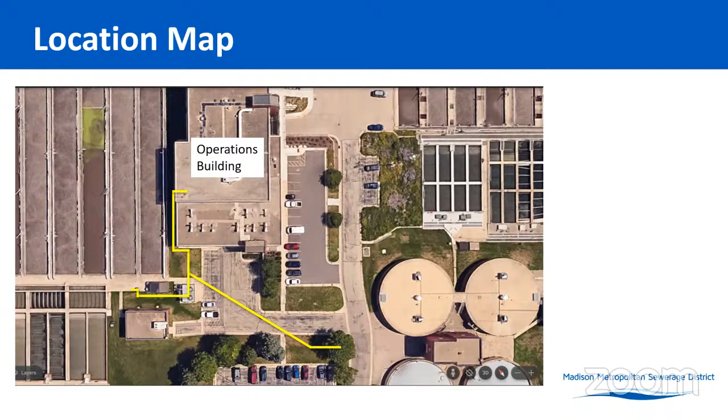The issues with this pipe: it's constructed of pre-insulated fiberglass, which is typically not used for hot water piping. We typically use carbon steel. Sections of this pipe are 40 plus years old, installed in the 6th and 7th additions in the late 1970s and early 1980s.

In recent years, they've had a history of leaks, sometimes leaking hundreds of thousands of gallons out of the pipeline at a time. So we have to do a quick repair on those.

The fiberglass piping requires specialized fittings and tools for installation and repair, something we don't have here in house. And a recent major break was deemed unrepairable with normal methods such as pipe clamps or repair patches, things like that.

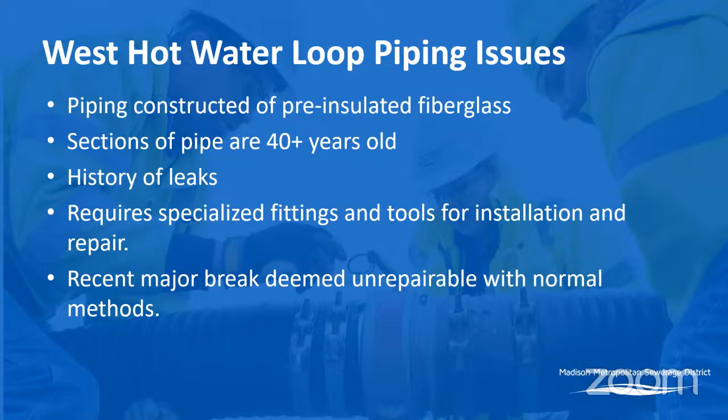Just to give you an idea, on the lower right where I've noted a leak location, this is where our carbon steel pipe meets the fiberglass line, and this area has been prone to leaks. Almost annually, we dig it up and put a repair patch on it. It leaks mainly in this area because you've got two different materials, steel and fiberglass, that expand at different rates, causing the leakage.

The major break location on the left occurred in January or early February, I think early February. Basically, the pipe sheared. A lot of water came out, we lost pressure in the system, and we immediately had to shut things down.

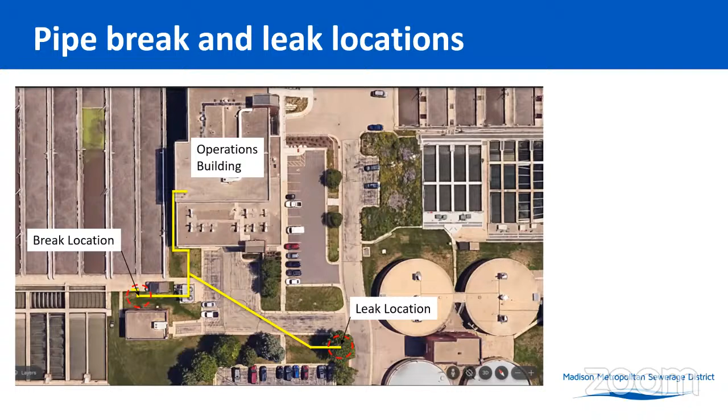I do have a picture of those pipelines here. Circled with the dashed circles are 3 different breaks in the pipeline - there's a hole and 2 shear fractures. You can see them on the bottom of the first picture and on the picture on the right.

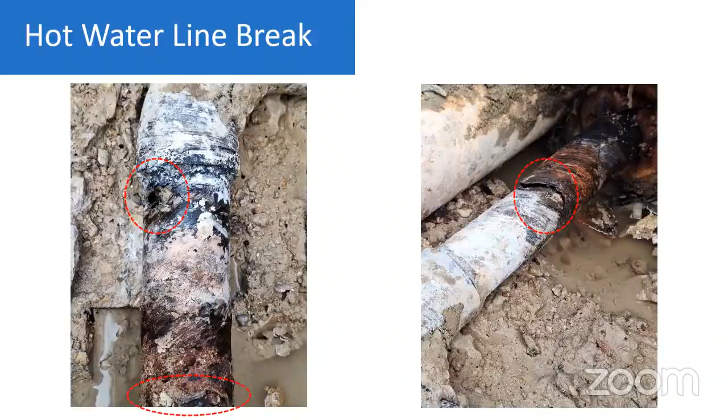So the importance and urgency of this project: the major pipeline break is unrepairable, we don't have the tools to fix the fiberglass piping, and it's a heating and cooling source for the operations building.

In the winter, it heats the operations building. In the summer, we take the hot water, run it through an absorption chiller, and that actually cools the building. It's a heat source for other process buildings on the west side of the plant, and it's also a heat sink for the blower engine. What I mean by that is once the hot water flows through the operations building and the west side and the heat's used out of it, we send that water to the engine where it picks up new heat. So it actually cools the engine, and we're using that waste heat from the engine to reheat the water.

If we don't have this loop in service and the temperatures get hot enough, we might not be able to use the blower engine, which means less biogas we're using and more electricity we're purchasing in the end to aerate the east side of the plant.

So the scope of the project involves removing the existing fiberglass piping, underground piping, and replacing that with new carbon steel piping with the proper thrust blocking to protect against expansion. The scope includes all excavation and backfilling by the contractor, removal and replacement of any curb, sidewalk, and floor. This piping comes into the building underground about 10 feet, so they'll have to break up some of the floor to get it installed properly.

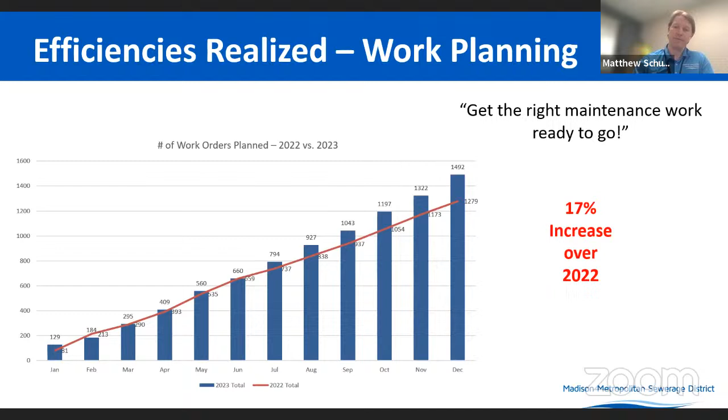But that work planning is only as good as our ability to actually get that work done in the field. So a major piece we also focused on is weekly scheduling, work scheduling. Really, this weekly scheduling is a routine with maintenance and operations where we work together on increasing the efficiency of our crews to ultimately get work done.

And how it does that is first, we understand a week in advance how much available labor we have for a crew, and we fill up that available labor with work orders that have been planned. We don't want our crews going out to the job and waiting for parts, right? So they're scheduling from a work bucket that's already got the materials needed, ready to go.

It also gives our operations team upfront notice of the processes and assets we need to have down to complete the work. So the reality is they can plan ahead of time on these outages. We have the equipment down and ready to go, so maintenance isn't waiting around. If the equipment's ready to go, we can start the work.

All this work has shown some really positive results. So really the end result is more work got done in 2023 than in 2022, which was also kind of a banner year since we started a revised work order tracking routine in early 2020. You can see here the increase shown: roughly 17% more maintenance tasks were finished within the maintenance crews in 2023 than in 2022.

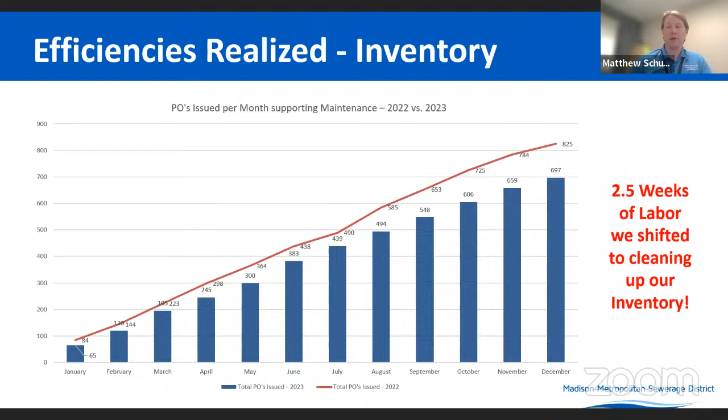And both those activities, the payback for us is we got time back, 2.5 weeks overall. That's time we invested in doing more improvement activities, cleaning up our inventory, and also supporting the planned work processes we just talked about.

So through RCM, we're looking to improve the effectiveness of our work to impact our strategic focus areas. We want to shift our culture from a reactive work culture, where we're dealing with issues as they come up, to a proactive culture, mitigating failures before they arise. In the end, this is safer, cheaper, and less risky for the district.

So what we have here is a P-F failure curve for a piece of equipment. Basically, the bottom axis is time, and the left axis is the resistance to failure. As time goes on, as an equipment or asset is used, it's most likely going to move towards failure.

That's at the end of the curve. There are ways to mitigate those failures by changing your maintenance practices. Right now, where we live is preventative maintenance. Those are basically time-based or equipment manufacturer-based tasks to keep the asset functioning properly. The problem with preventative maintenance is you really don't know the health of your equipment. You're just doing maintenance that's suggested to keep it operating.

In 2024, and a little bit last year, we tried to move towards predictive maintenance. Predictive maintenance is using tools to find out the health of your equipment and find minor defects before they become major. Through predictive maintenance, you can make repairs much more cheaply, much more effectively, and much earlier to prevent catastrophic failure.

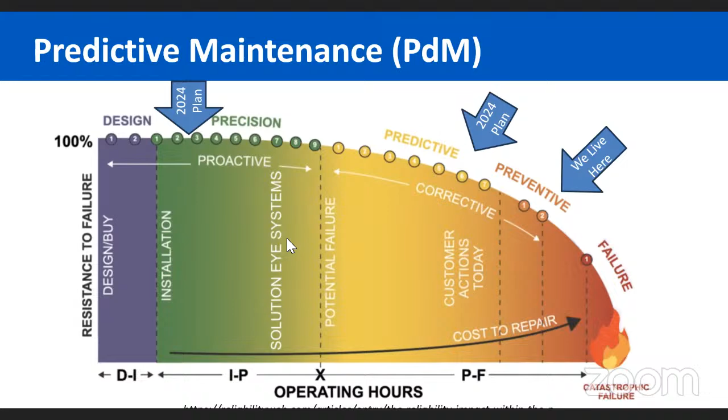One way we tried to increase effectiveness last year was performing electrical signature analysis. Electrical signature analysis is a tool developed by this gentleman, Howard Penrose. It basically evaluates the condition of mechanical or rotating equipment, for motors and driven equipment, by looking at the electrical signature that the piece of equipment produces.

Through his programs, he's identified different defects that you can see through these electrical signatures. Last year we had about 100 assets analyzed, and it takes about 3 to 5 minutes per asset for the analysis to be completed. Through this analysis we found 105 defects before failure - things like bearings wearing out, shaft imbalances, impeller imbalances, things like that.

Defects that can be fixed early and cost effectively without the equipment catastrophically failing. Also through his program, you can calculate the amount of initial or additional electrical demand on assets based on these defects. So what he found is annually we could be using about 242,000 more kilowatts of electrical demand based on these defects. By curing these defects, we can possibly save up to $35,000 a year in energy costs.

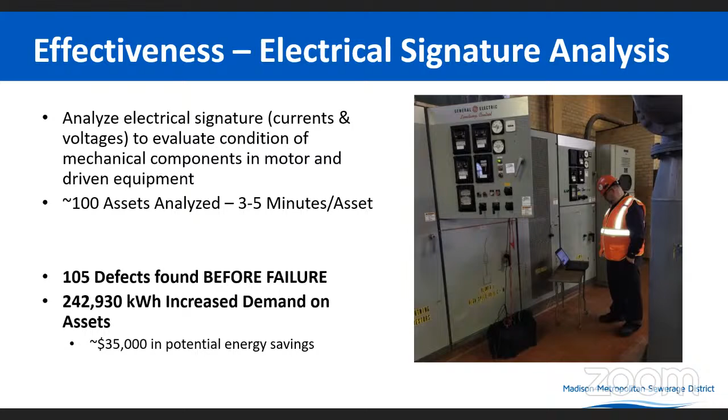Through the signature analysis, some other things came about. Through these defects, we could tell we're not lubricating our assets properly, or our assets aren't aligned properly. This is where precision maintenance comes in - getting that equipment set up properly so it functions well over the long term. This comes through training and standardization.

Getting the proper lubricants set up for the proper pieces of equipment, the proper amounts and types. Having our equipment aligned properly to proper tolerances keeps it running optimally. If you're not doing these things, you're actually introducing failure into the equipment and decreasing its life.

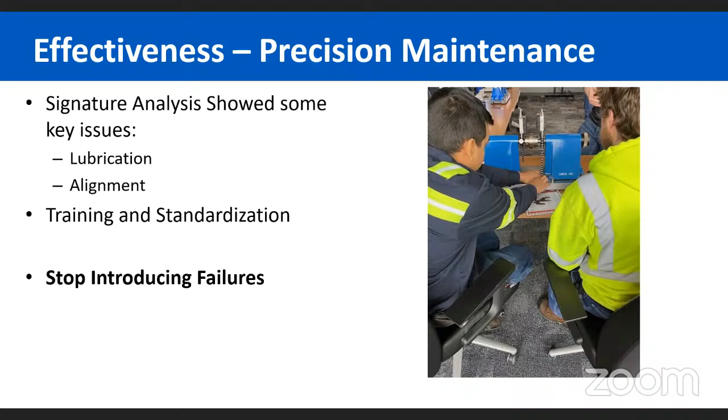Other than lubrication type and amount, lubrication cleanliness is a major contributor to asset failures and something we're looking to upgrade on. You might look at new oil when you take it out of the jug or barrel, and it looks clean, brand new, but there's things called critical clearance particles in oil. These are particles you can't see with the naked eye, but they can get in between the clearances of things like bearings, and those are the particles that actually do the most damage to the equipment.

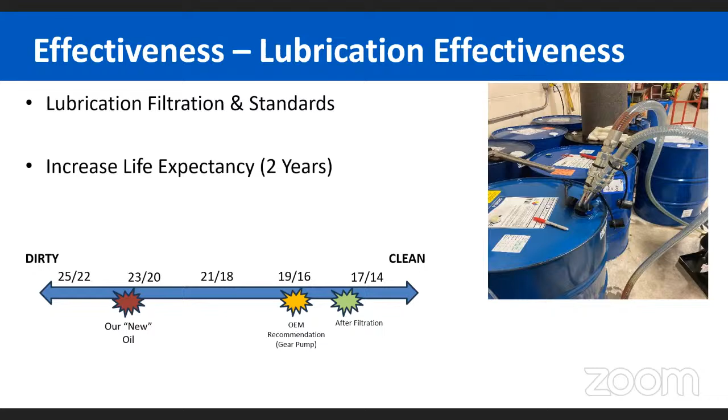Through filtration, we are able to get the oil cleaner than the original equipment manufacturer standards, and we can prolong the equipment life up to 2 years.

The final effectiveness tool we're using is ultrasonic analysis. You can see Dan there performing an analysis. It's basically a tool that can hear frequencies the human ear can't hear, but they indicate there are minor mechanical or electrical defects with the equipment. These are things like air leaks in pipes. You can't hear it - it's very quiet to the human ear - but these pick them up pretty well. And these air leaks can actually cost a lot of money in the end with compressors running longer, etc.

Using the ultrasonic tool, you can actually decrease the amount of time it takes to PM equipment by 66%, saving 307 hours annually, or about $46,000 in labor, as opposed to traditional methods of PMing electrical or mechanical equipment.

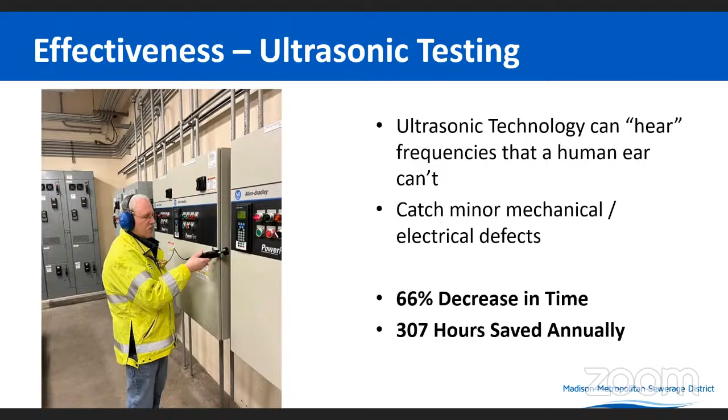Yeah, just more of a comment than a question, but I think this is terrific. I wholeheartedly support this, I can see a lot of advantages for doing this, and I think it's a terrific program. I do have a question though, and that is, this is a really timely topic given the spill we had recently. I'm wondering if there's any way we could apply this to our underground pipes and valves to really kind of foresee any potential damage in the future and take care of that. So I'd be interested to hear what you think about that.

Thank you. Matt, would you like to take this, or you want me to take it? I can start, and if you want to jump in. Sure. Thanks for the question, that's a good one. I think we're not promising to be able to solve every single failure that's out there. With RCM, I think it's a learning process that takes a lot of time, and we're just kind of starting out in our journey on this process.

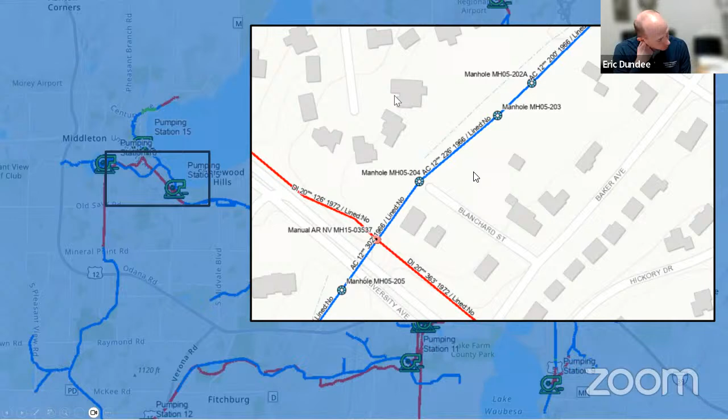We're talking about 145 miles of pipe. That's what we have. We have 98 miles of gravity main, which in our GIS system would be the blue lines, if you can see those. I apologize for those who can't see color, but that would be the blue lines. The red lines are force mains. So we have 32 miles of raw wastewater force mains, and then we also have our miles of pipe for effluent force mains back to our outfalls.

On the screen, you can see in the center, if you can see my pointer of the inset, there is a red manhole here, pink. That manhole is the manhole we were trying to work in. So as people have tried to understand the situation, that manhole is, I would call that a conflict structure. It has a gravity sewer main flowing through it, and it has a force main flowing through it. Now, the force main is not an open system, so it's just the pipe going through the manhole. But that is right here in this area.

The greenway that the city of Madison was under construction with, and Michael has talked about, is right to the west-northwest of the property, or of our gravity main, going down to Lake Mendota Drive and Lake Mendota, so that's just along the north side, I would call that. I'll move through here and come back to this picture in a couple slides, but that's kind of the setup we were at, working in this manhole off of University Avenue to replace the valve. The greenway was to the north. We'll go through here. So this is what the manhole looks like.

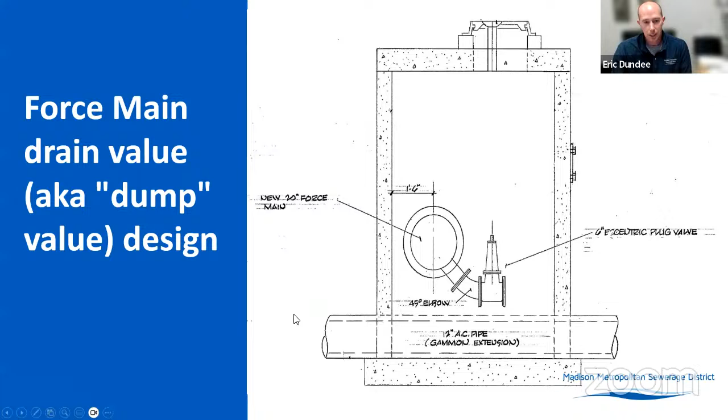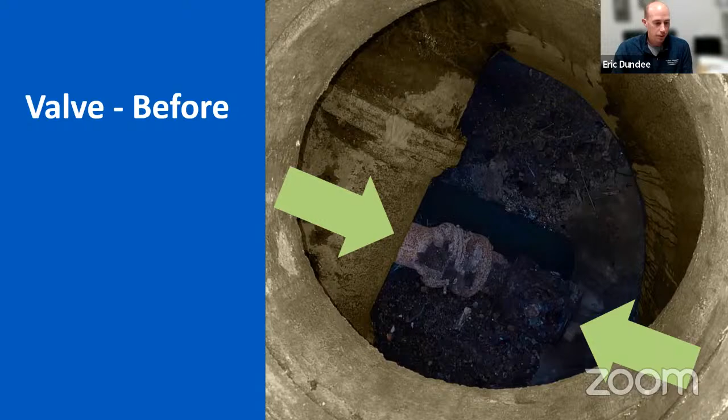As we've talked and gone through this process from Thursday to now, we've already started our review of the situation. So here it is.

Here's what the 50-year-old valve looks like. Here in the bottom right of the screen is the actual plug valve, the actual plug. So that is what we were trying to get opened to relieve the pipe. As you can see with the condition, it was frozen in place.

What we have now also found is on the other side of the pipe, where the force main was, you can see that this was already solid sediment, grease, and other things that had settled into the force main. So we already know that when that valve opened up, this type of material is what came out of the force main into the gravity main and helped create the blockage in the gravity main that created the SSO.

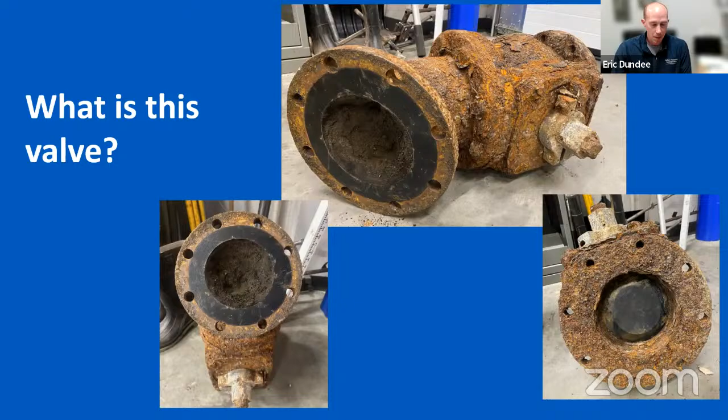So there's a couple things going on in this situation, and that's part of the story here—that amount of material that was in the force main came out and helped create the blockage. So I'm going to go back to the map to explain it a little closer.

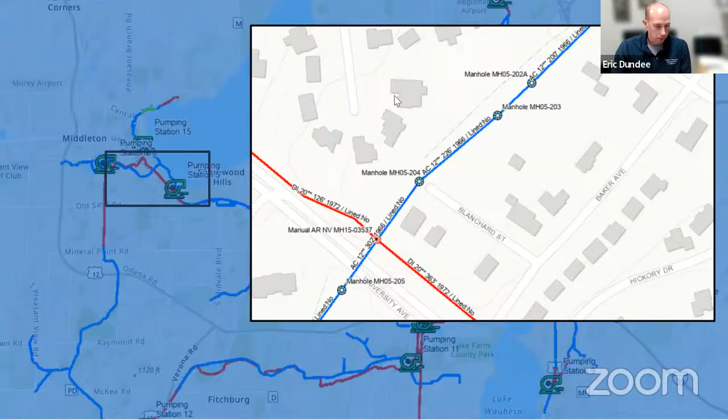This is where we needed the assistance of the City of Madison to respond. I'll just say they've been a great partner during these emergencies—they come out and respond right away with Vactor trucks. In this case we needed what they call a rodder truck, because they needed to actually pound through the debris to break it up.

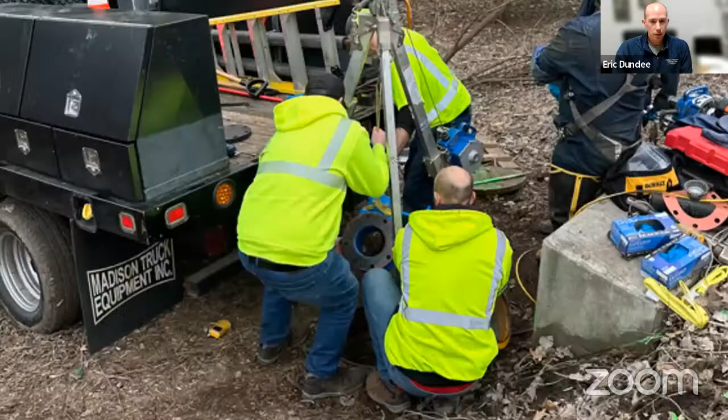So that's the manhole. Getting a little bit into the pieces of work that happened—here is staff on site. This is the manhole and the constraints we're working with in the actual manhole where the valve broke.

In the center of the screen, you can see this blue thing tied up on the tripod—that's the new valve, and that's us trying to get the valve down into the manhole tightly. Our collection system services crew, right here with harnesses and boots on, is preparing to get down in and figure out the plan to get in.

As Michael said, in that 10 minutes to get bolts on that, you can see the bolt patterns and how things get attached here, get down in there and do that. We had safety staff there, and many other staff working to do that. As we were working on all that, I want to say our communications group really helped work on the public outreach.

This was a piece of a message that they took out to site and handed out to neighborhood residents that we thought could be affected. The idea was to get the information out. They worked with Dane County Public Health, and our operations team worked with the DNR on response and the spill hotline. Amanda and her group also worked with Dane County Emergency Management and the City Emergency Management.

As Michael talked about, Incident Command, ICS, Emergency Response, we delegated work to each department or person to make the response as fast as possible. That was the goal here, to minimize the SSO.

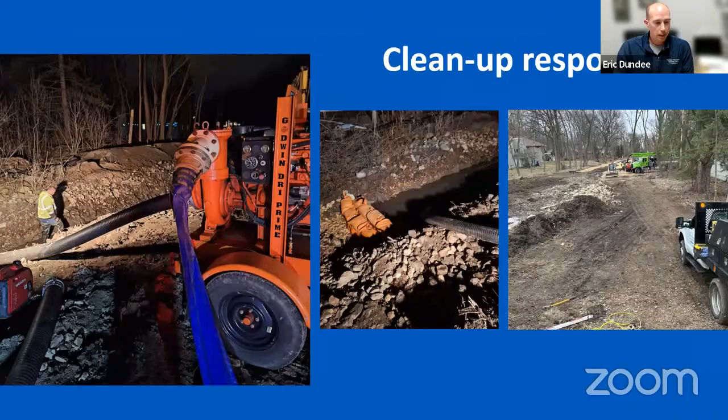And then here's some after pictures. This is the day after. This was the actual manhole that had the sewer overflow in it. Once again, active construction site, so all of this rock was already there. This is part of a tracking pad for some of the utility work that was going on in the greenway. Just wanted to show that.

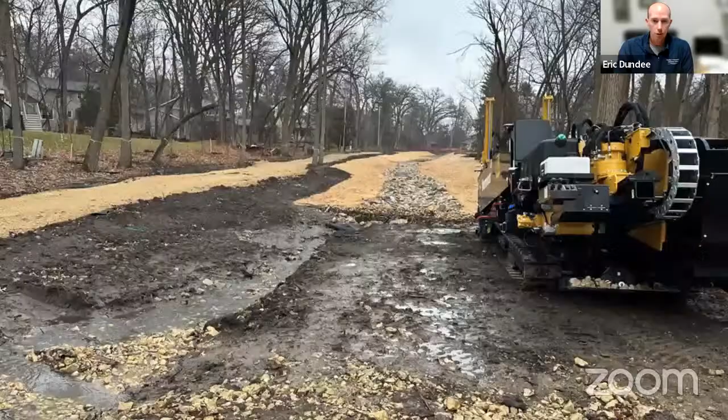And then the next picture is kind of the look down the site. So from the manhole, you can look towards Lake Mendota. And it did rain, as Michael said, weather was not on our side. We knew we saw rain coming the next day, and we scheduled our staff. We actually sent people home at the beginning of this to go get some rest, to come back, because we knew we were going to have a situation where staff were going to abut what I would have as an internal rule of nobody in an emergency situation over 16 hours in a shift.

Our staff come in at 6 at night or 6 in the morning. So as you're getting closer to the end, we knew that once we get enough people on site, we have to figure out what staffing looks like to keep response going for an extended period of time.

We have been in contact with the DNR and public health, continuing that. City of Madison, they have a project manager on the Greenway project that I've been in touch with multiple times. As Michael said, working through the insurance process with the two property owners.